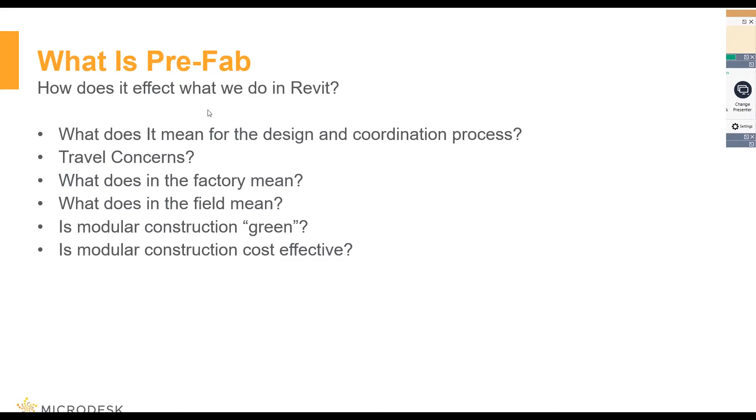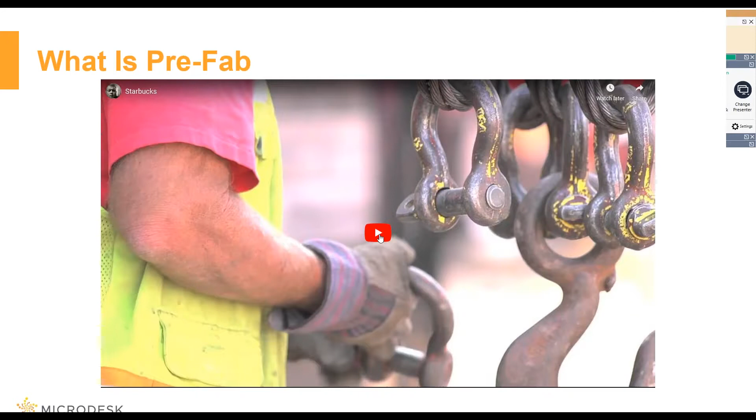So I want to show a little video that we had put together for a project I worked on for Starbucks. Now, this project was worked on back in 2012. This is something I was involved with very intimately. And like I said, it was everything from the design process. This was a large program, so there were multiple of these that we kind of kicked out.

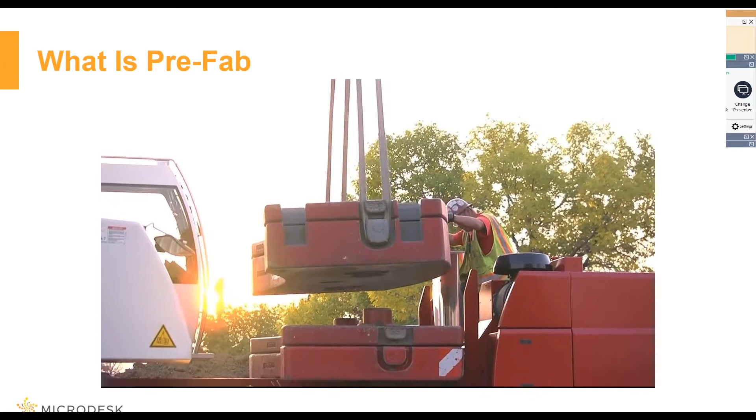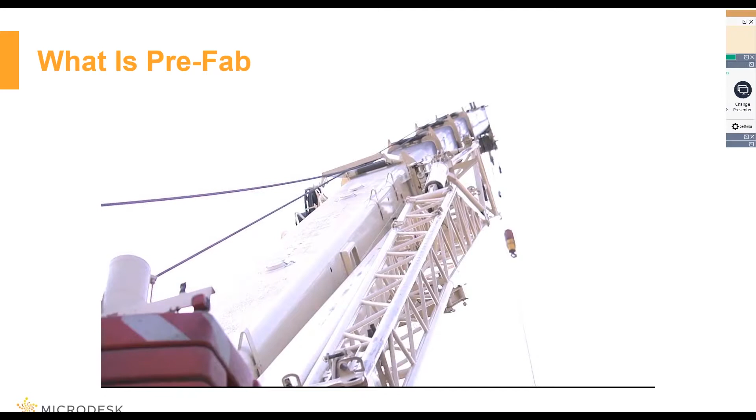What modular meant to me at the time was this: we had built these units off-site for another company I was working for. We built these micro stores for Starbucks, pulling them out on site.

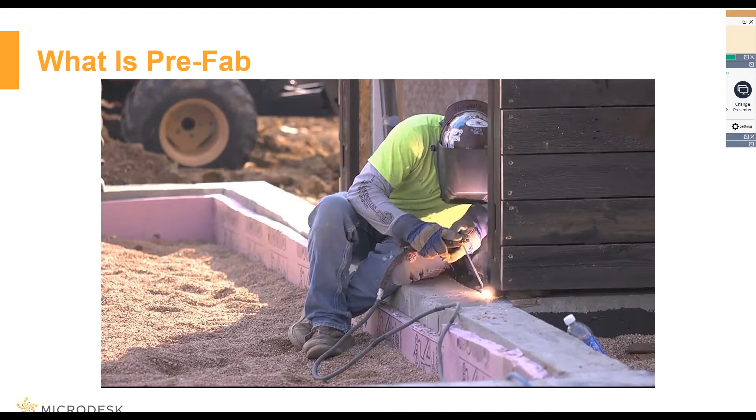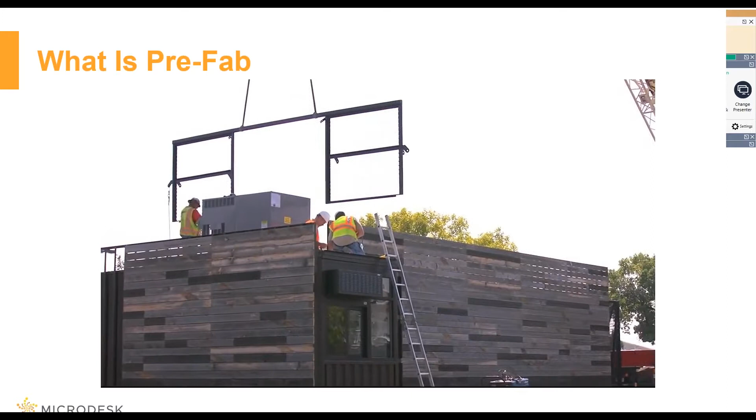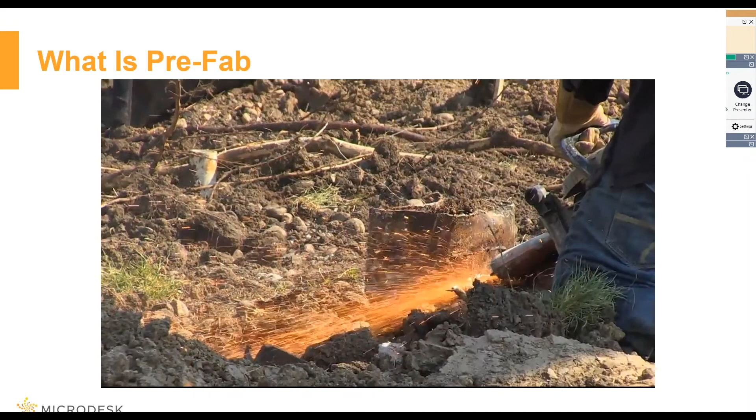We would build these in the factory and ship everything inside of them, from equipment to rooftop equipment. How can we as architects challenge the design process when it comes to modular? It's green, it was LEED certified, put up in 2 weeks. You see a big dirt field on site, and then within 2 weeks you have a completely operating functional store.

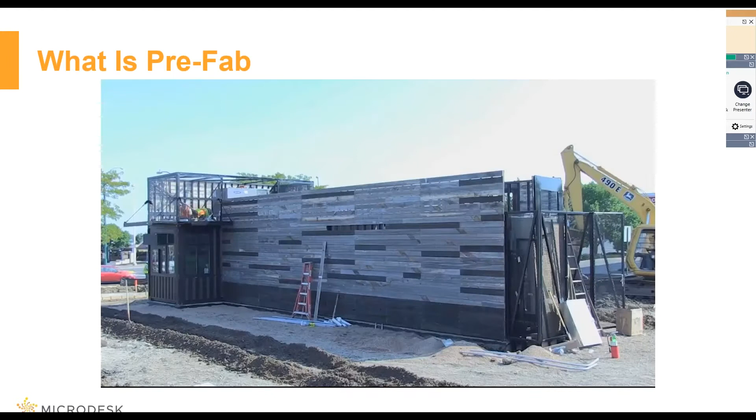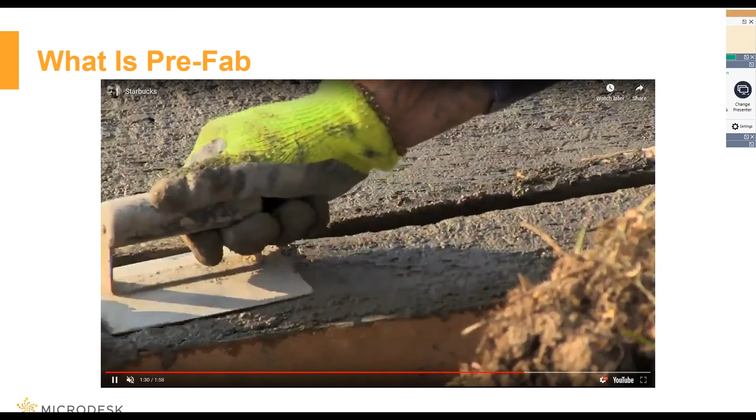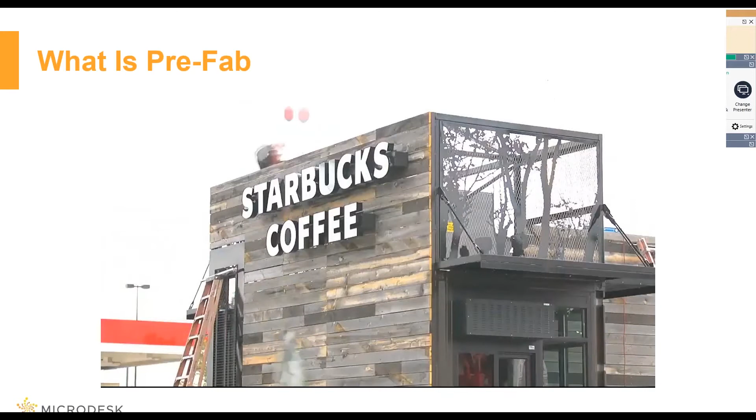What does that mean for us as architects? How can we challenge that design process? How can we come up with something cool that is local, built in the factory, cost effective, and built green? Green is such a hot topic lately - it's the bingo word of the day. Is this sustainable? Is it green? Is it delivered on time? Are we using the tools we have to come up with something really cool - off-site, modular, green? Let's take the variables out of it and build it off-site.

One thing I wanted to talk about is travel concerns. This is another example of a similar project we built. The one you've seen before was built out of a container; this was built out of standard construction off-site. When we're moving these things over the road, what do we as architects look for, and how does that key into our design processes?

So travel concerns: width, height, length, and weight. Those are the 4 key points when moving something over the road. Every state is different, so I'd suggest doing some local code research, whether through the DOT or through local jurisdictional and government agencies.

In Michigan, for instance, anything over 8.5 feet wide, 12 feet 6 inches in height, 45 feet in body length - which is the module length - and 60 feet in overall length including the towing truck, requires a special permit.

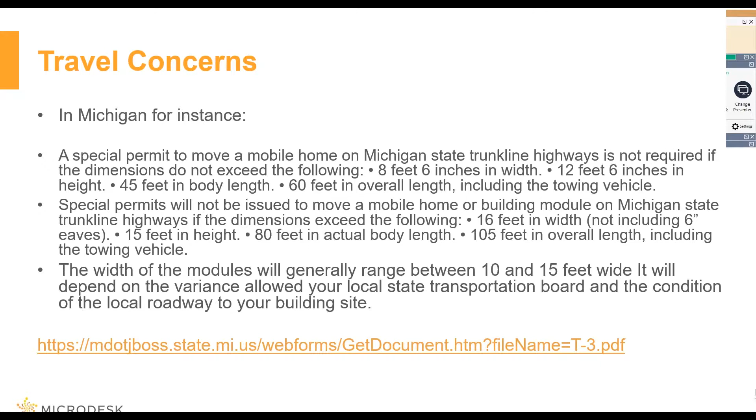So what do we look at for codes? I was designing a programmatic approach, meaning we could take this building and put it anywhere in the US, designing for the 90% case. As architects and designers, we know not everything is going to be a programmatic approach, but if you're trying to design something that can be made by multiple different manufacturers, you can approach different manufacturers.

You can spread this design culture you're trying to build across the United States, like we were with the Starbucks program I worked on. We looked at designing for the 90% case scenario.

We created a table for the project, and we would cross-check all the codes and how that fit in. We had a master set that included not only the IBC, but California building codes and Miami building codes, so we could pop those in and out of our Revit model. I don't want to talk so much about semantics and small things like how I'm pulling things into Revit, because most of us already know - what I'd assume is we're interested in BIM.

We know what Revit can do for us, but how does it apply to us? Revit allows us to store information like a giant database and push that information into the model. We pluck out information we don't need, and pluck in information, and see how it tweaks everything.

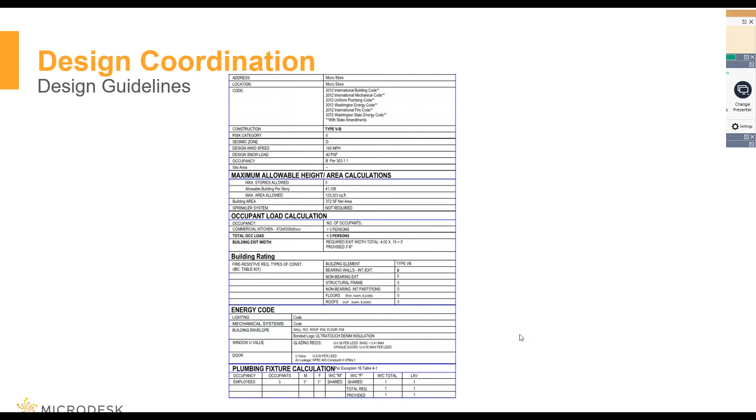I'm telling you right now, it wasn't a really big square footage. It was 372 square feet, I think, for my total building area for this little guy.

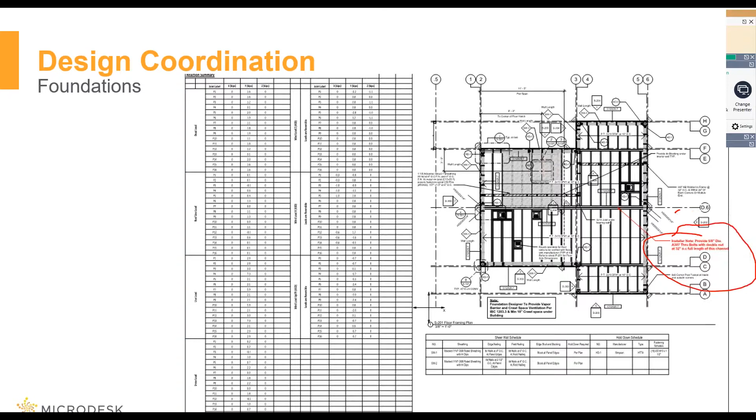So this is another example of what is field versus factory. This is what we have to deal with in the design coordination process. This was along our moment and shear reactions for the structural drawings. This would say, hey, you need to reference this detail out in the field here because there's something important going on with this strap going along here.

If we reach back even further and say all construction is modular, what do I mean by that? We're building these things from a kit of parts. We have standard W sizes, standard sizes for lumber, 2x4, 2x6, standard lumber sizes for sheathing, etc. So we're building a Lego kit of parts, somewhat to that effect.

A lot of times how these manufacturing facilities work is they'll go and cut all of the studs for all of the walls. They'll say, okay, I need 26 studs, 10 feet 6 and 5/8 high, and they'll slap these walls together in a jig and build those. We can get into that a little later as well.

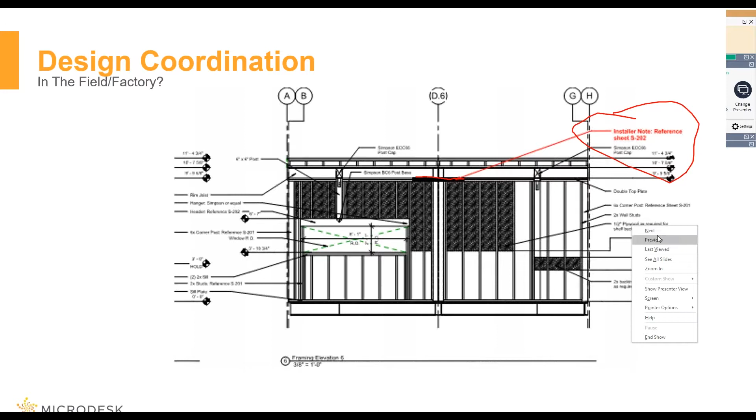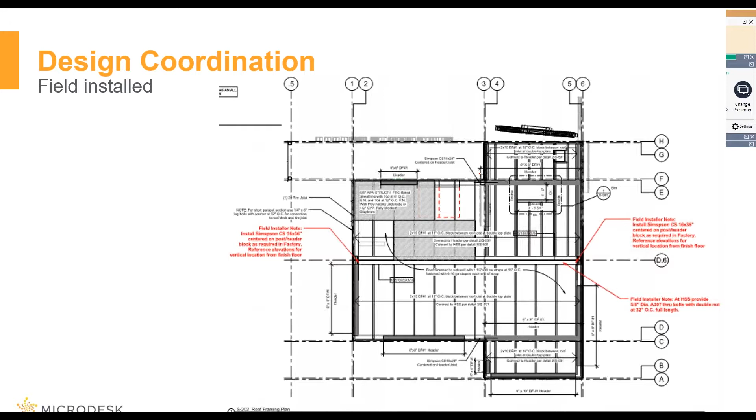Here's another great example of field installer notes. We're talking roof here, so this is a roof framing plan. This shows a Simpson CS 16x36 centered on post and header as required in factory, reference elevations for vertical locations from finished floor. This tells me I'm going to factory install part of this, but then finish the connection over here in this detail. It's telling you to provide bolts all the way across. Again, it's just the difference between factory and field, and that design coordination needed to make things relatively easy on site for the people working with you.

Design coordination, it's all in the details. What do I mean by that? So we have this canopy, a bolt-on accessory to the exterior of this building. It was prefabricated off-site by a local awning company. We're going to drag these things across the nation, so we need multiple local companies to build these pieces and parts. How are they affected? Well, let's give them the assembly details over here for all of the metal pieces going on, and then tell everybody how they're attached to the building here on site.

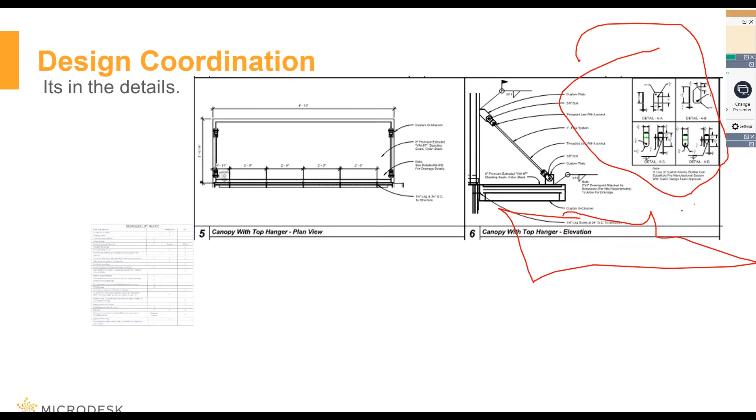Another big thing here is responsibility. When you're designing a modular, you have the field and the factory, and what happens if you have some client-supplied equipment like specialty IT equipment or a security system? Who is going to be setting the building - whether it's the general contractor, the modular company, or whether the client is just buying the building from you. This is easily dealt with using Legends in Revit.

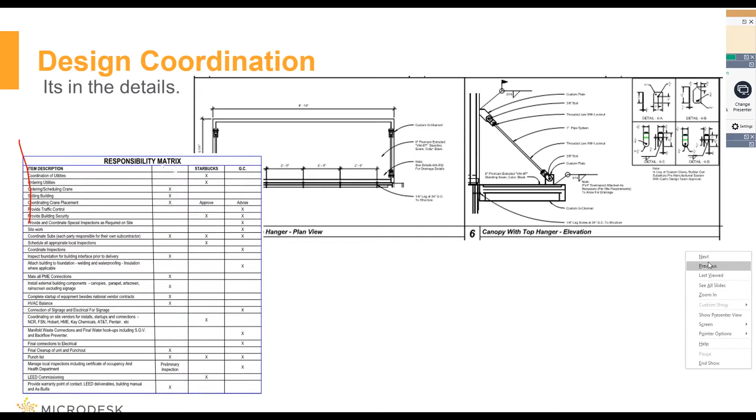Here you can see there are different areas of responsibility for each individual person. I'm not going to go into specifics on how to create that schedule during this webinar.

This is the awesome piece of Revit - this is what Revit kicks out as part of a schedule for specialty equipment. As you can see, there's a responsibility matrix here, showing what we were responsible for as far as specialty equipment. Everything else was client supplied. It shows whether it should be ordered, whether it's shipped to the factory or to the site, whether it's installed in the factory or on site, and who it's installed by.

When you have things like soda machines, etc., as far as food service goes, some of those pieces are installed by the actual equipment vendor themselves.

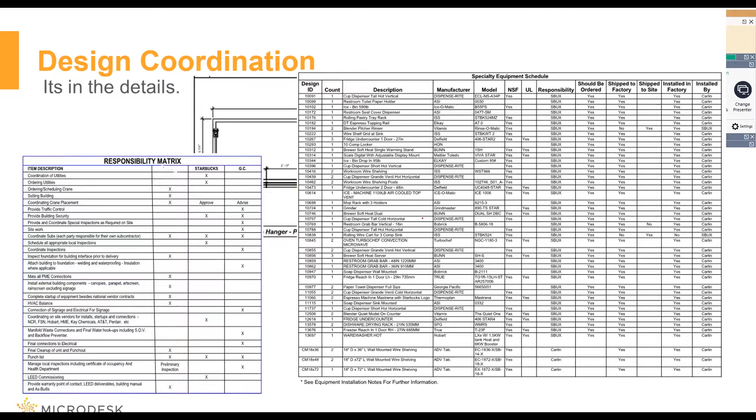There are so many things we can do just as well in a factory as we can on-site. However, if it's raining outside, it's not going to cancel your day, because the entire building is literally being built inside of a factory. All the tools are on one job site. It's going to reduce the number of trips back and forth from your office to the job site, or from a contractor's office to the job site, therefore reducing your carbon footprint. Everybody loves that.

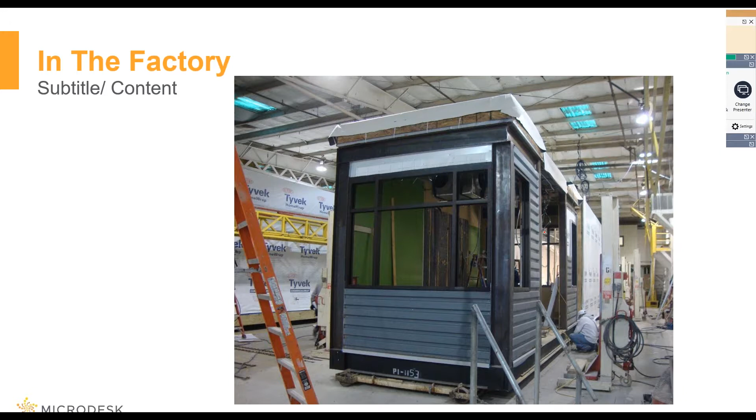So here's another great example. This is something I would draw for the factory. This shows the exact heights of each piece of plumbing equipment here. And you'll notice I still have the same thing up here in the top corner - whose responsibility, should it be ordered, where it's shipped to, where it's installed at, and all of that good stuff.

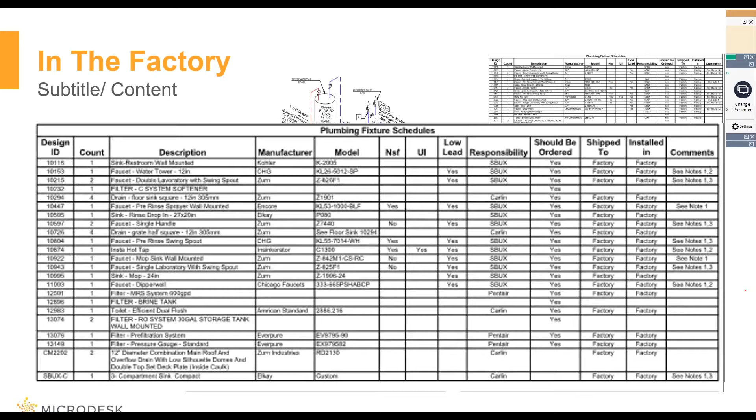So here we go again - here's that great Revit schedule. 90% of what we do in BIM is so we can export a great schedule as far as an architect goes. We can go into coordinating elements and heights, such as using BIM to our advantage to set the height of a wall for a receptacle. We can set the height, get everything put together, see how it interacts, and that way we're coordinating our stuff before it hits the field.

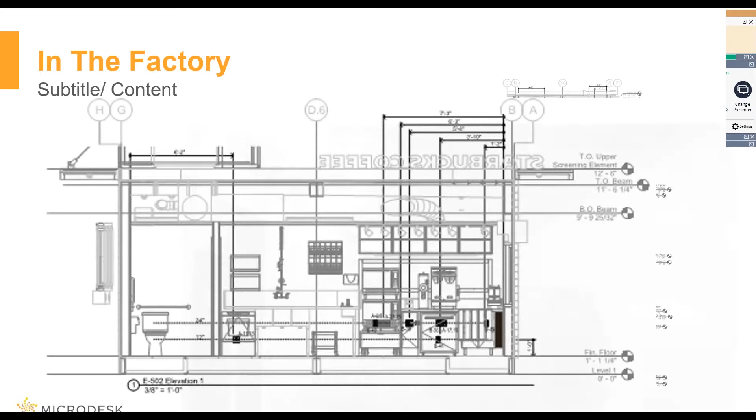The stuff is all built in the factory. You can see this is one module that I worked on. How important is BIM in this process? You have a 48-inch by 12-inch deep duct that is literally sandwiched up against the ceiling of this container - how are we going to get water from one side to the other, electrical from one side to the other?

How is all this running? How am I going to fit all of this into such a tiny space? Modular makes you think about coordination.

How does BIM affect, or how does BIM fit into the prefabrication role? Everybody thinks, oh, this project is so small, I don't understand why we're using BIM. Well, it is so small, and it's even more important to use BIM and Revit, for that matter, to put things together on the computer before they hit the ground floor. Because once they hit the ground floor, it's over.

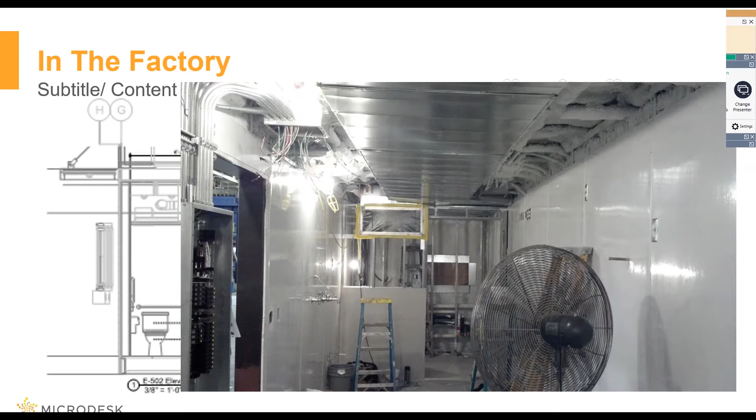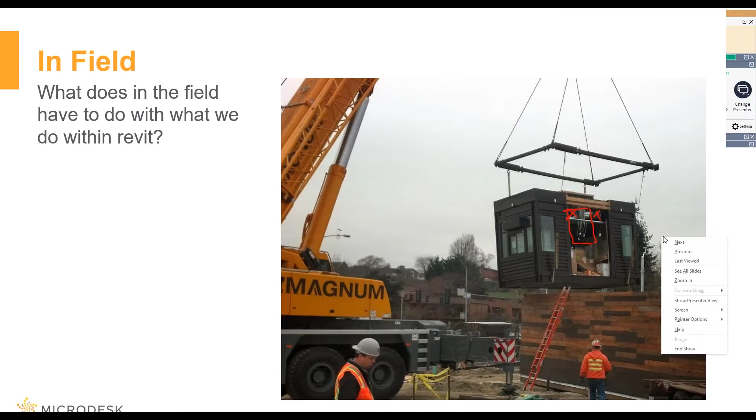Everything we do in Revit has to match with what we do in the field. Otherwise, you're going to have angry individuals, and we all know how that can be.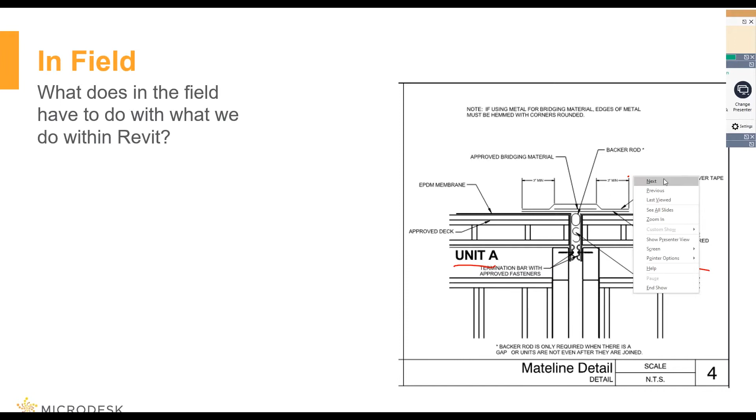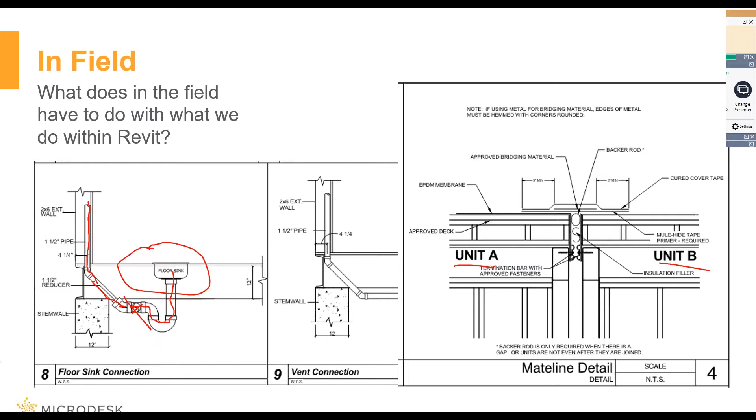Here again, so we have this pipe, which is prefabricated into the wall with an elbow in it. And the rest of this here, including the floor sink, is site set. So this is coming up. You have your horizontal connection here, and we need to connect to the vent that's going up. So how does this building interact with the site once it hits there?

So what I want to talk a little bit today is, PowerPoints are great, but when it comes down to the details, how do we do some of the things we just talked about in Revit? So I'm going to pull up Revit real quick. We can look at some test case scenarios.

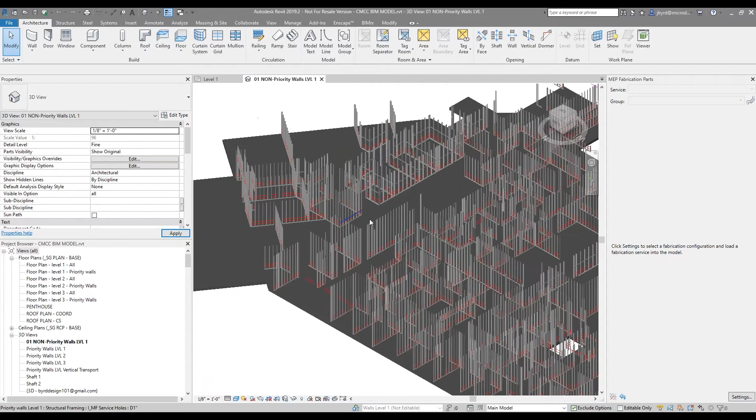What I talked about earlier on was, how do we prefabricate certain things off-site? Maybe it's not an entire building. This is modeled in Revit. So as you can see, this tells you on the stud, I want to prefabricate X wall. Well, how long is said wall? We can find out by selecting this track down at the bottom.

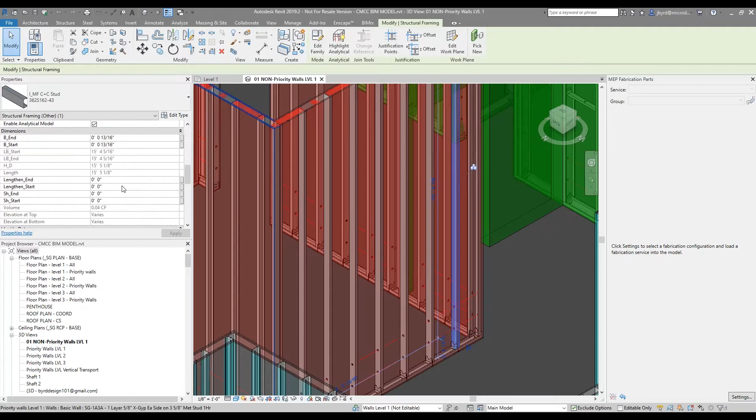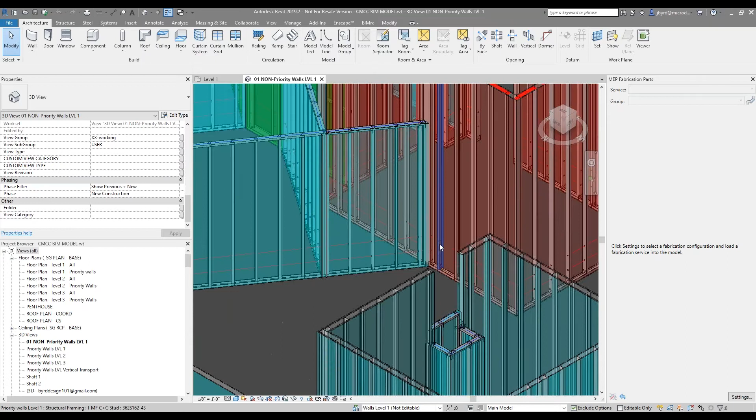And for that matter, if the electrician wanted to, we could set the heights of the holes in the wall studs and prefabricate half of our electrical off-site and just do the connections once we get on-site as well. So this is a good test case scenario.

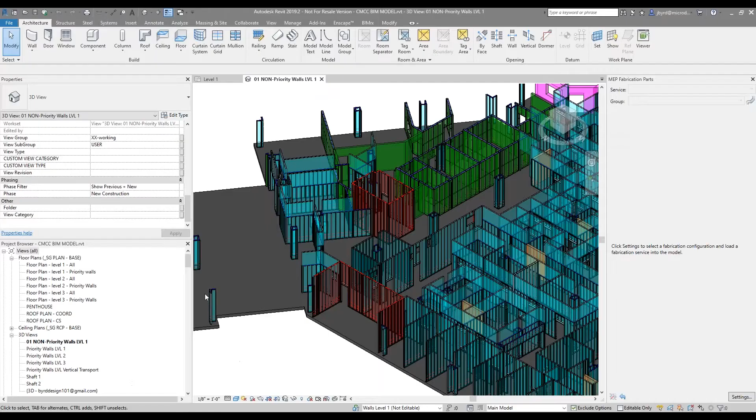So, with that said, we're going to look at this and say, okay, how do I set boundaries inside of Revit where I understand whether my module is going to fit within those length, width, and height restrictions? Well, I'll show you.

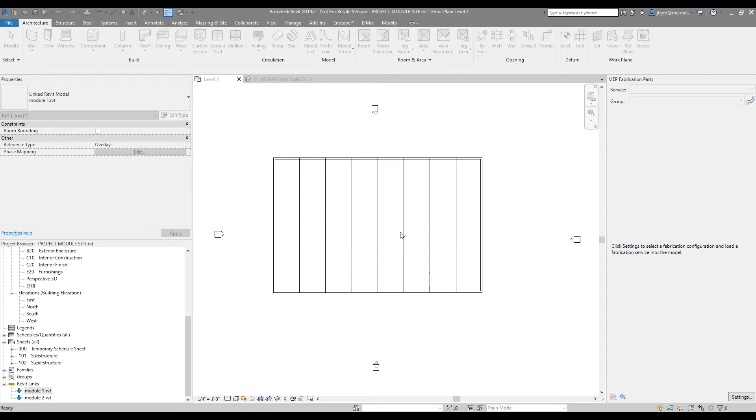I'm going to open this module here, unload it from my project, and I'll show you how I have things set up.

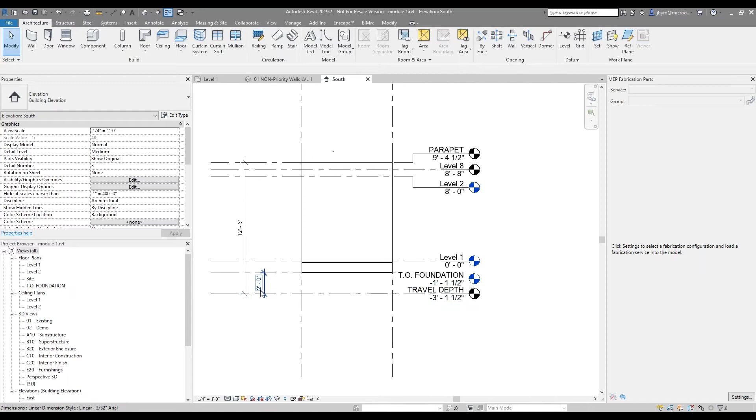So I built this as a test case scenario, 12 foot 6 high from start to finish, and we use a travel depth of 2 feet. What I mean by travel depth is you're going to have a carriage that sits underneath the module along with tires and wheels, so you have to account for that when figuring your over-the-road height.

And how do I find that dimension? Usually I find that by talking with a modular manufacturer. Or if you are a modular manufacturer, you'll know your height, width, and depth parameters based upon your local DOT regulations.

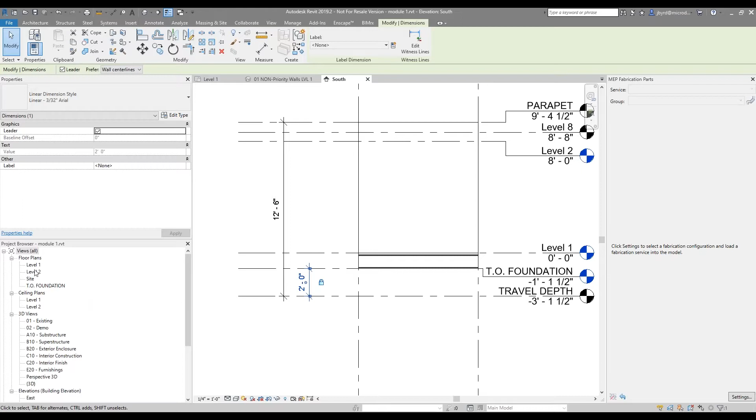So we're looking at Revit and saying, how do I know my overall length, width, and height in floor plan? What I like to do is just set up grids here. It makes life easier on everybody.

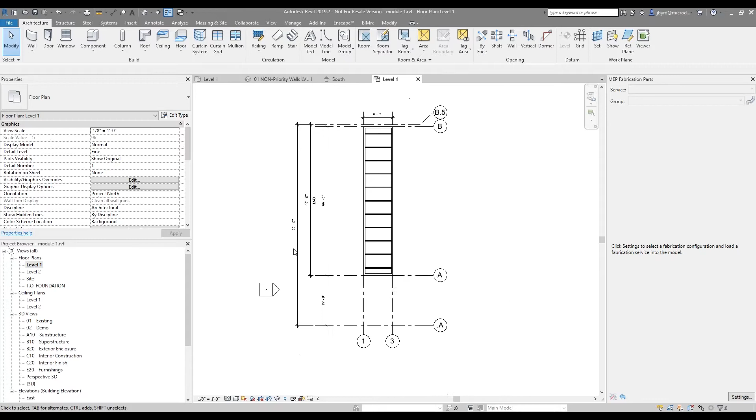We know that our truck's about 15 feet long. Our overall, without getting special permits, is 60 feet. So I'm going to draw my module at 45. But you also have to be mindful that none of the siding can stick beyond that 8 foot 6 inches in width. None of our add-ons, bolt-ons, extensions, or anything can extend beyond the box that I'm showing here: 8 foot 6 in width, 45 max.

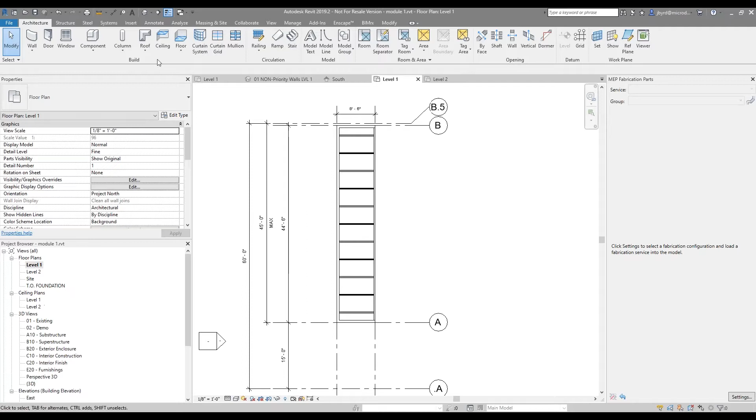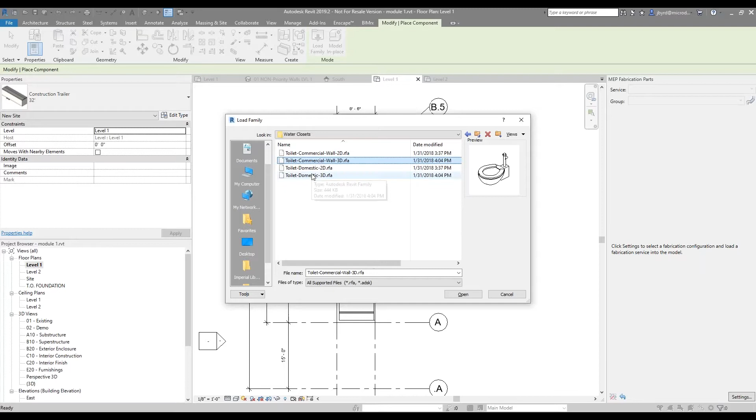So what I'm going to do here is place a few items. I'm going to place a component, load family, and go over to plumbing, architectural fixtures, and insert a water closet here. And I'm going to insert a couple more components here. So we got some water closets here.

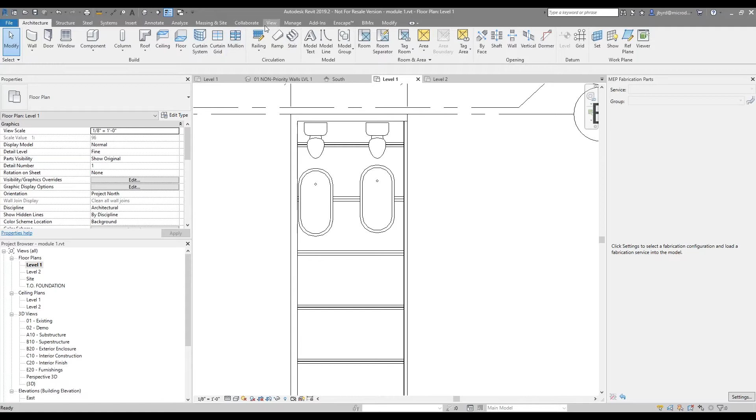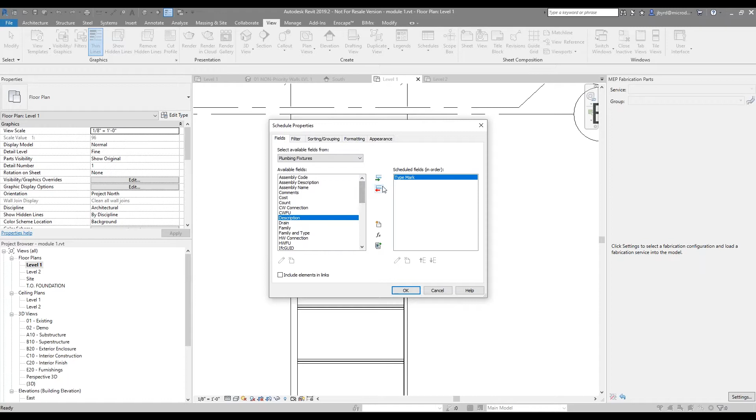What I'm going to do here is create a schedule specifically for you. So I'm going to go to view, schedules, quantity, and create a plumbing schedule real quick. Plumbing fixture schedule. And let's create a type mark in here, and go to description. Very basic plumbing schedule here for you.

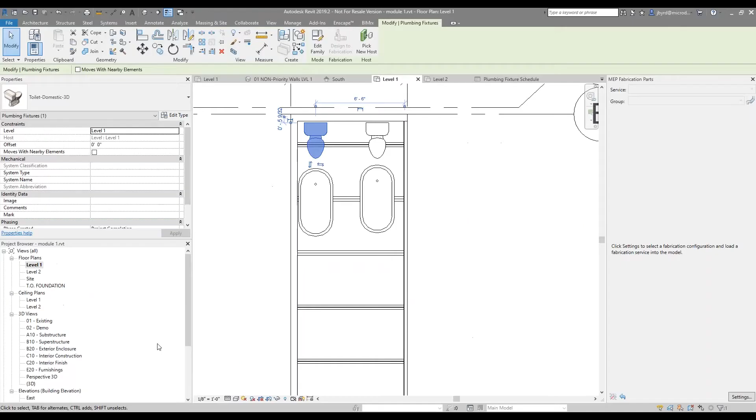So we know we have elements 1, click OK. It's going to change those 2 elements, elements 2, click OK. Go back here. We know that by looking at these elements—oh, what did I do here? Wonderful Revit trick: if you click the wrong button, like F1, it opens a window for you. So we look at the type mark for these tubs. We know that they're type mark 2.

We know that the water closets are type mark 1, water closet. And I'm sure that with your firm you have specific families that you guys use.

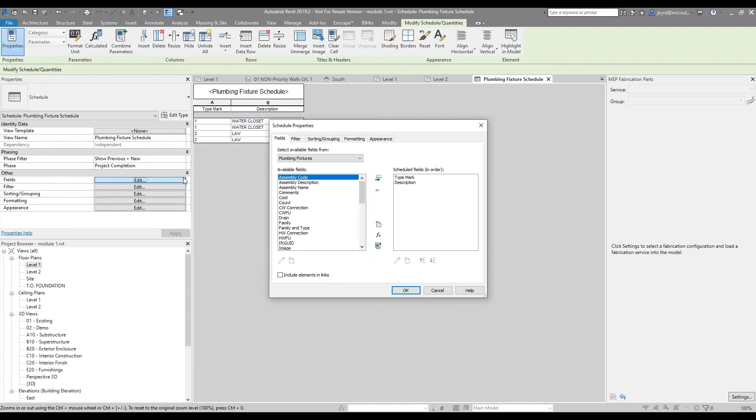Okay, so how do I tell Revit something's installed in the field or factory? What I like to do is create a new parameter. And depending on whether it's an instance or a type parameter, I call it an instance parameter because it says field or factory. So here I type under the parameter data, field.

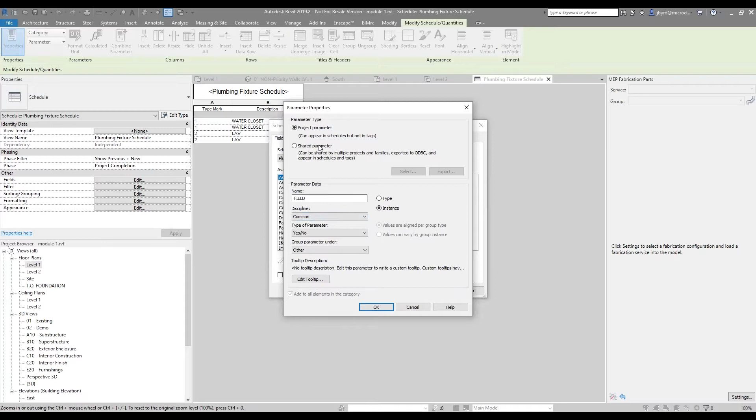And we're going to create a yes/no parameter, and we're just going to create it under other for now, common discipline. And we're just going to create a project parameter and click OK. This gives me a quick and easy on/off toggle.

So we can say plumbing fixture schedule, click overall—you can name it anything you would like. And we're going to look over here and say, okay, well we got a plumbing fixture schedule overall. We're going to take and duplicate.

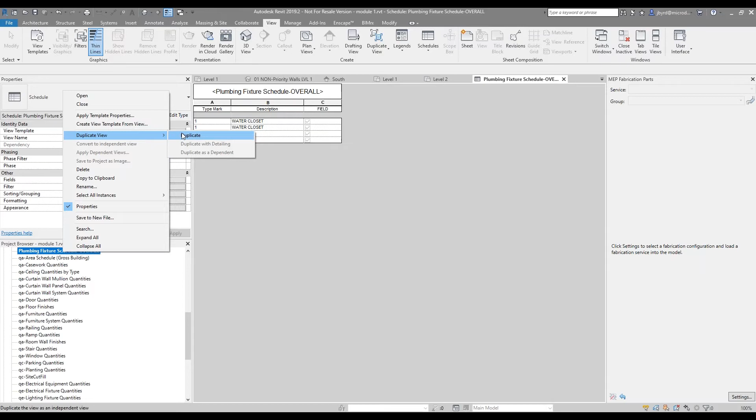Duplicate. And we're going to rename this field. And we're going to rename this one factory.

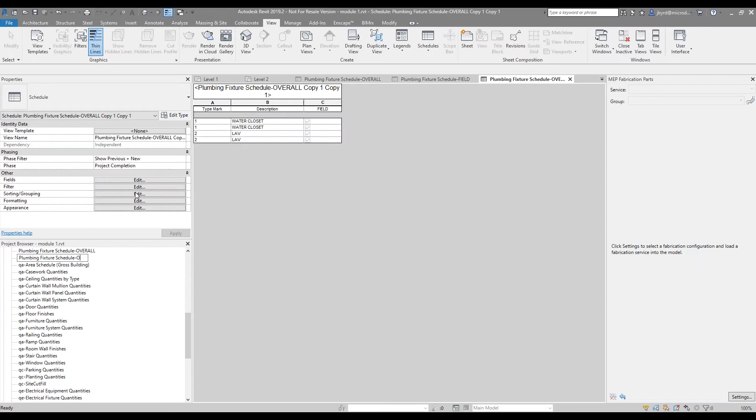Well, how does that affect me? Well, that affects me by, you know, takeoffs. So what we have is we have field, we have overall, we have factory. So I'm going to go to overall and change these two here to 'in the field.'

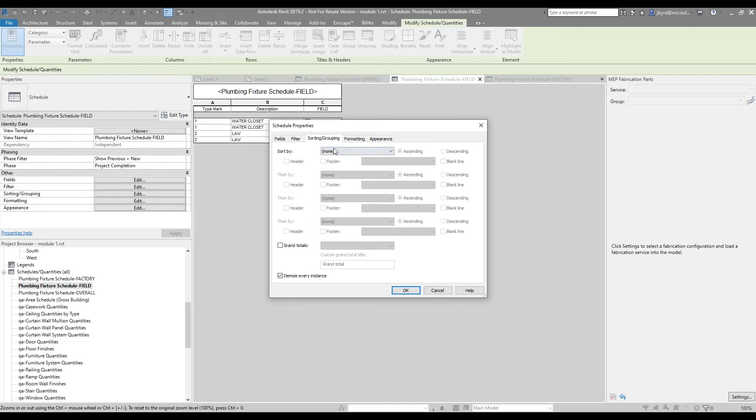Okay, now what we want to do is go over here and sort and group those. Filter by field equals yes, and click OK. And now only my field-installed items show up on this schedule.

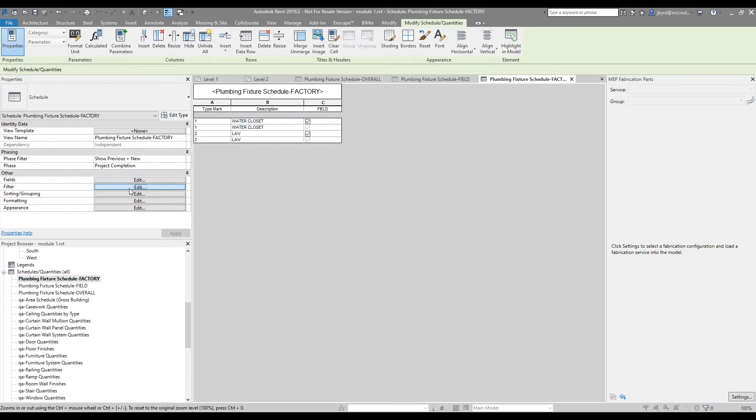And I can go over to factory, go to filter, and say field equals no, and click OK.

So what that tells me is that these items are installed in the factory. We could have a schedule sheet dedicated just for the field people so they can cross-check their items before they leave the factory. We can have plumbing schedules work this way, and casework schedules working this way.

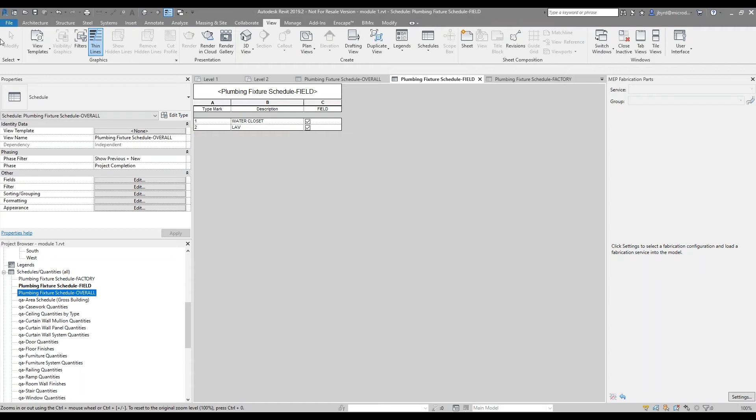There's so many things that BIM can do today that wasn't available back in 2012 when I was doing this project, this test case scenario, that are now available to us as far as extensions to make our lives easier. The premise for moving BIM forward is to create an environment that all of us want to live in.

It's to make our lives easier at the end of the day. It's to be able to see things in 3D and put all these parts together while creating a beautiful design for the client. BIM is just as relevant in prefabrication as it is in the 26-story high-rise, if not more prevalent, due to the space constraints and sites that we see a lot of these modulars being dropped into.

We can drop a modular into a site 50 feet over another building without even touching it via a crane. We can prefabricate walls off site to reduce the amount of trips from job site to office. We can build it green. We could build it in the factory. We could build it on site. It just depends upon our site constraints.

BIM will work for prefabrication. It can work for small elements, large elements, multiple elements. As you see...